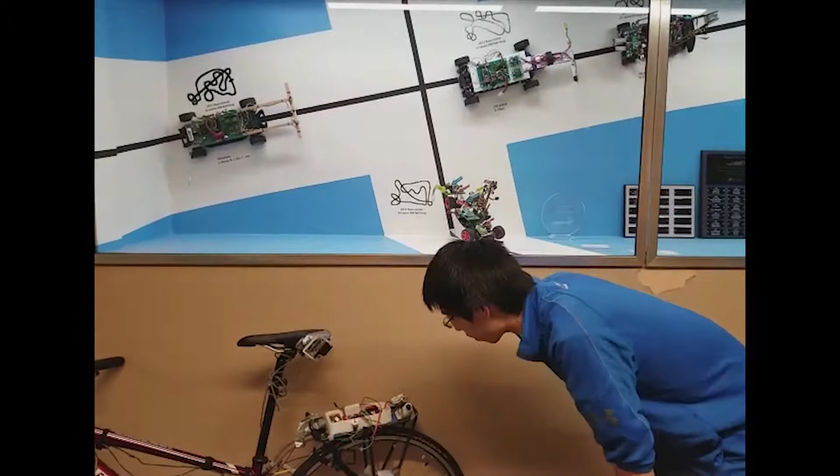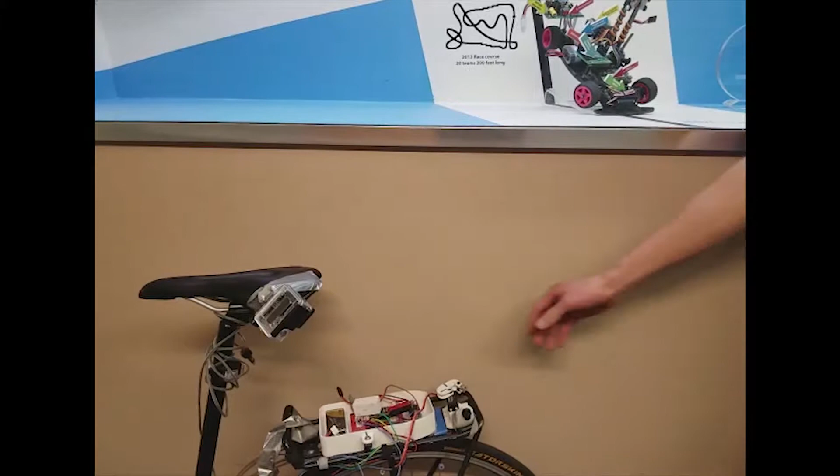So we had some issues where we didn't have enough magnets in our wheel, so the velocity update rate was too low, making it hard for us to control, so we added twice the amount of magnets, and that helped. Because it takes time for it to pull the cable, we got an amount of delay. However, we made it so that we have a shorter arm and we start at a closer to lock position so that we have faster response.

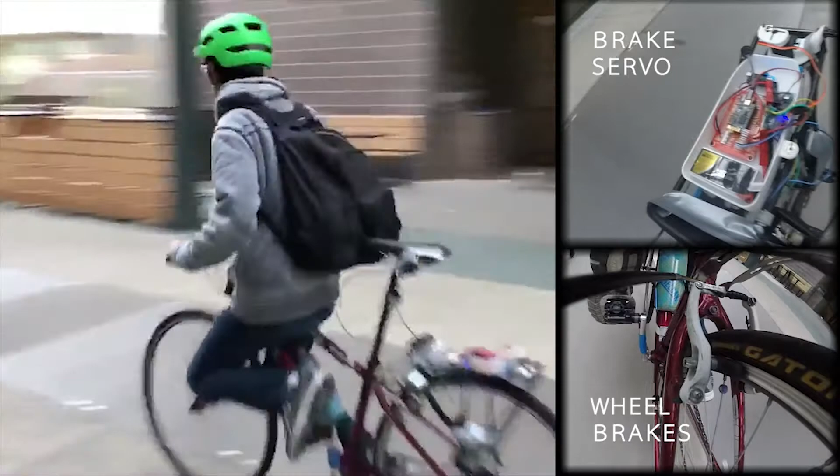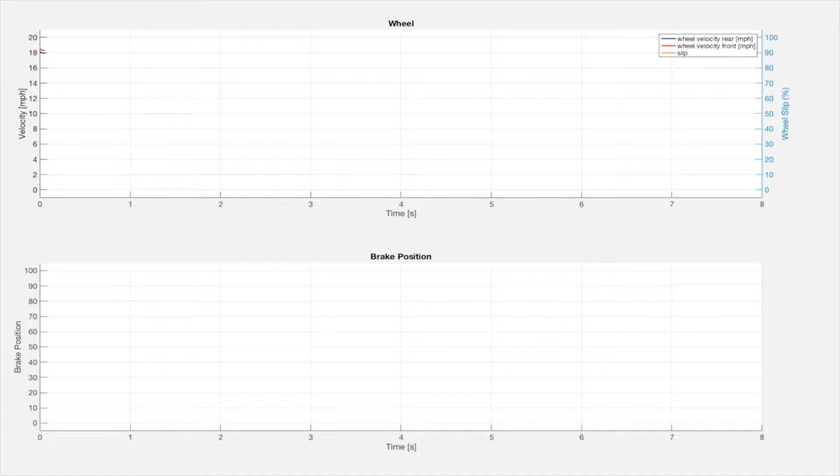This first graph shows data from our test where we locked up our rear wheel using our electronic brakes. The red line is our front wheel velocity and our rear wheel is the blue line, and you can see that it falls down to 0 and our slip value goes to 100% since the wheel is locked up. And the brake position is at max near 100%. The time taken to go from 16 miles per hour to about 5 miles per hour was about 3 seconds.

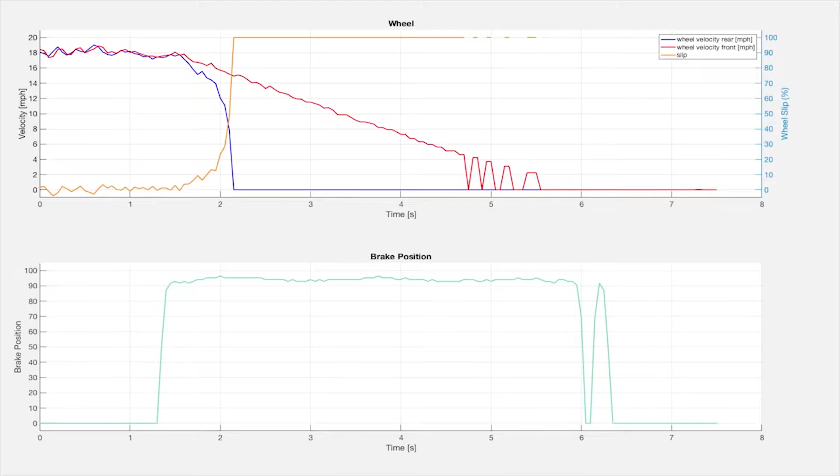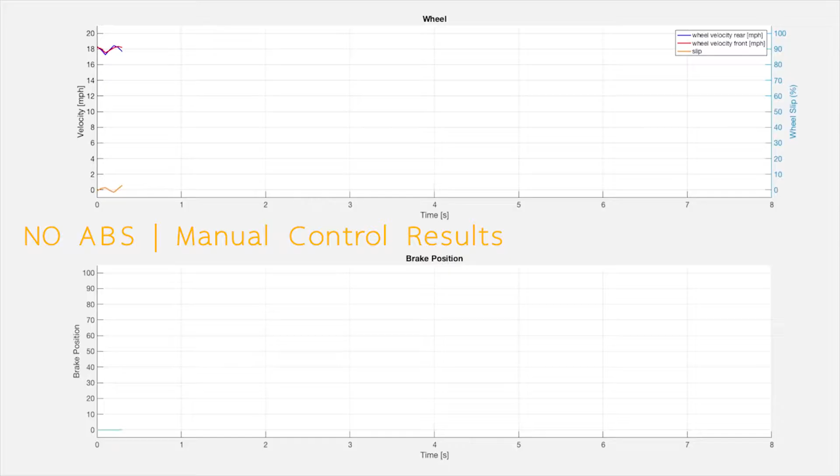This test was with the rider trying to modulate their brakes to simulate ABS without locking up the rear wheel. However, you can see that there's going to be some delay before the rider lets go of the brake after the wheel locks up. It took around 3.5 seconds for us to slow down from 16 miles per hour to 5 miles per hour.

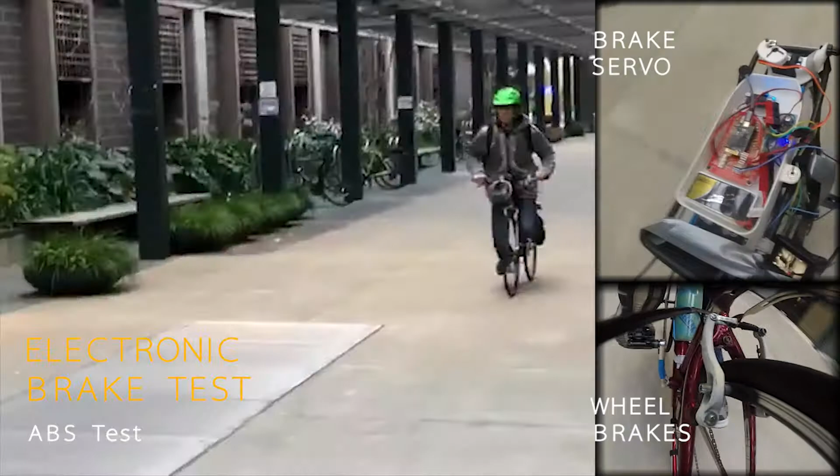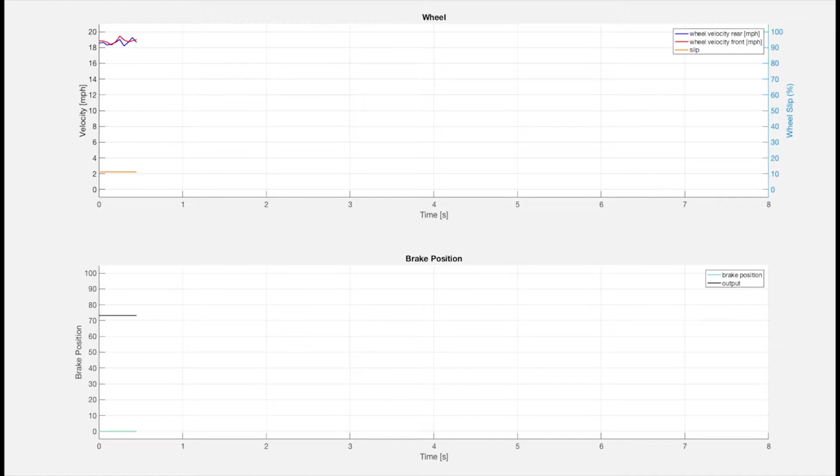So this final graph shows our anti-lock braking system in action. The black line is the output from our PID controller, and it will hover around 90% so that we maintain a slip of around 9%. And our wheel slip never goes to 100%, so then we have a faster stopping time.

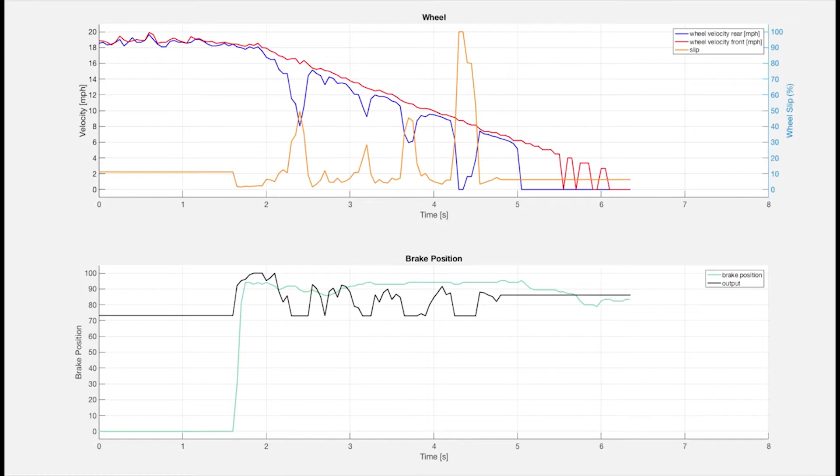It takes about 3 seconds to go from 16 miles per hour to 5 miles per hour, which is comparable to us locking up our rear wheel, but since the rear wheel isn't locked up, the rider can steer normally and is much safer.

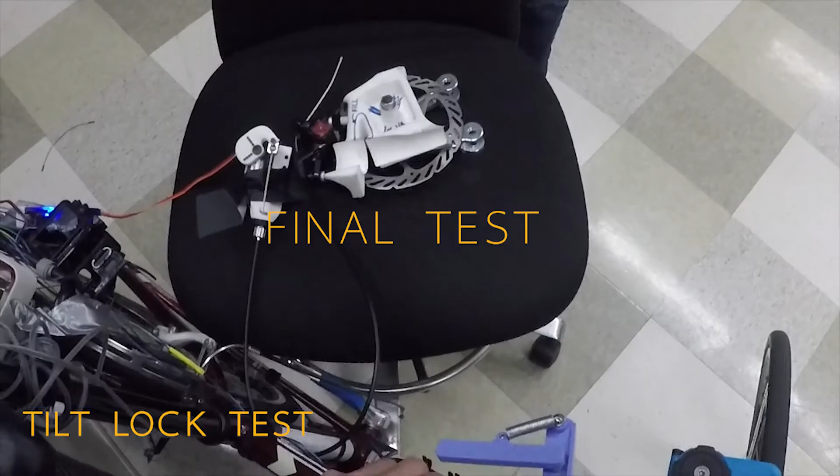This is our locking mechanism. This 3D printed mount will be bonded to our frame, and this aluminum rocker arm will be attached to our swing arms with a tie rod, and when one wheel goes up and the other goes down, the rocker arm will rotate, allowing us to tilt. And if we want to lock it, we can press our brake lever and it'll lock our tilt lock system.

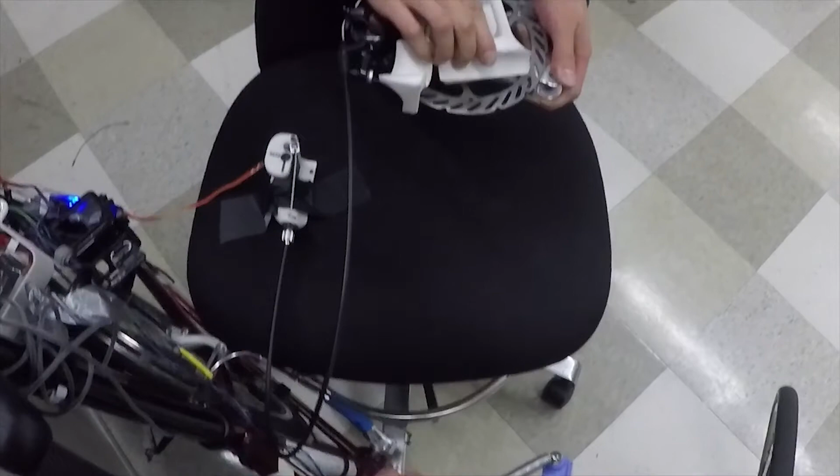And if we want to stay upright for a long time, when we're going straight or slow, or when we're parking, we can hold the lever for 3 seconds, and then if we let go, it'll stay locked until we re-engage the lever, and it'll let go.